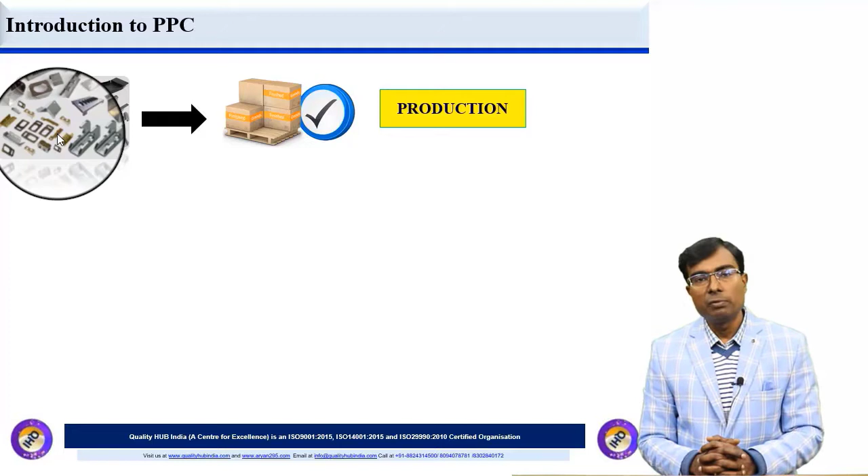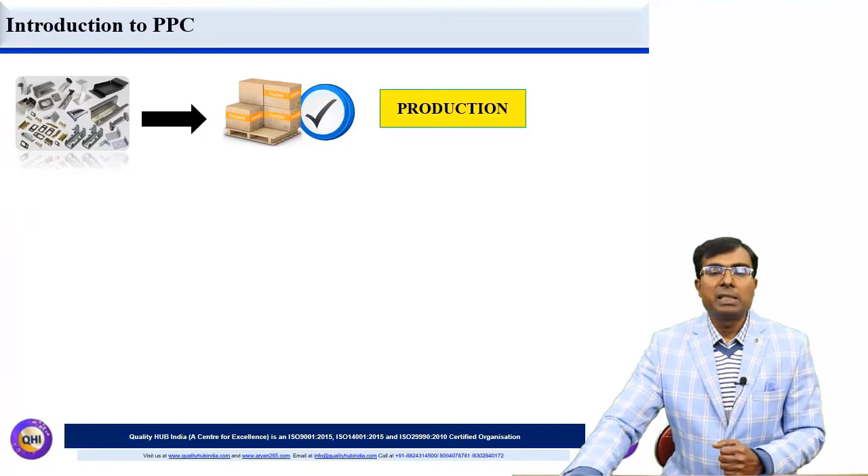So when we talk about production, it primarily intends to convert raw material into finished goods. So we might be procuring different kinds of raw material based on the kind of production or manufacturing activity we are doing. For example, you are doing some forging operations. So you might be procuring billets from the raw material vendors, and by using forging presses, you are going to convert the raw material into finished goods based on the customer specification, which might have come in the form of drawings or other documents.

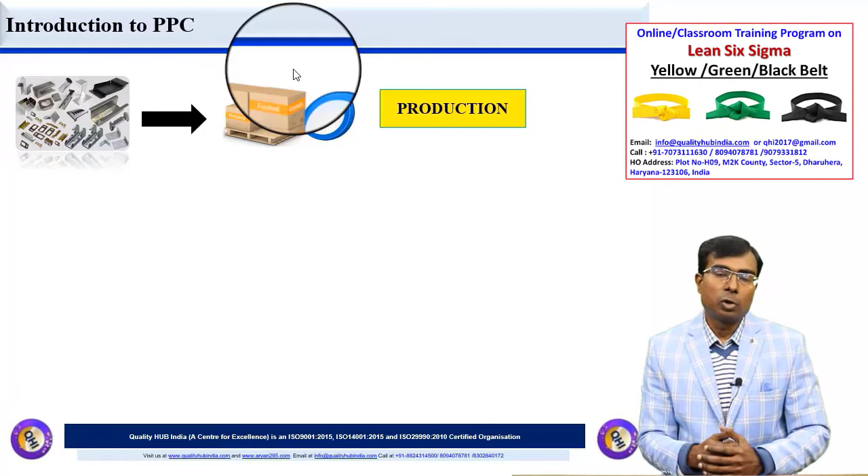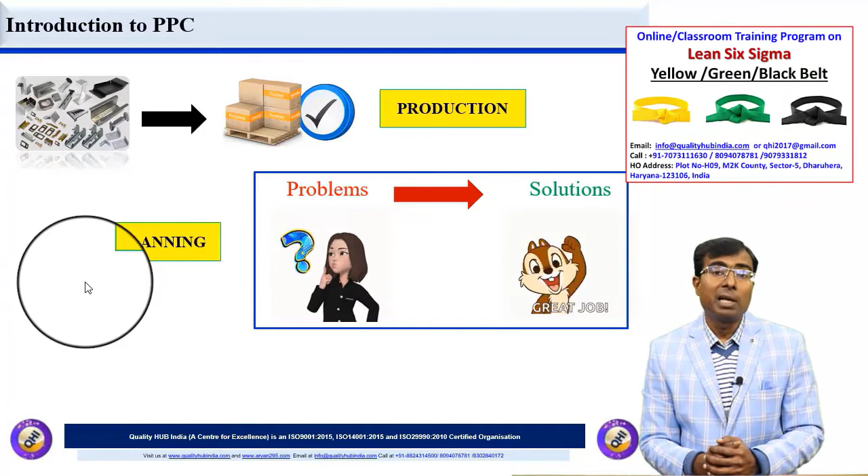The second term is planning. So when we talk about planning, it's basically the expertise of forecasting what kind of circumstances, what kind of failure might be occurring, and we should be ready with the solutions for that. For example, there might be some issues because of manpower unavailability, raw material unavailability, there might be some power failure, there might be some machine breakdown.

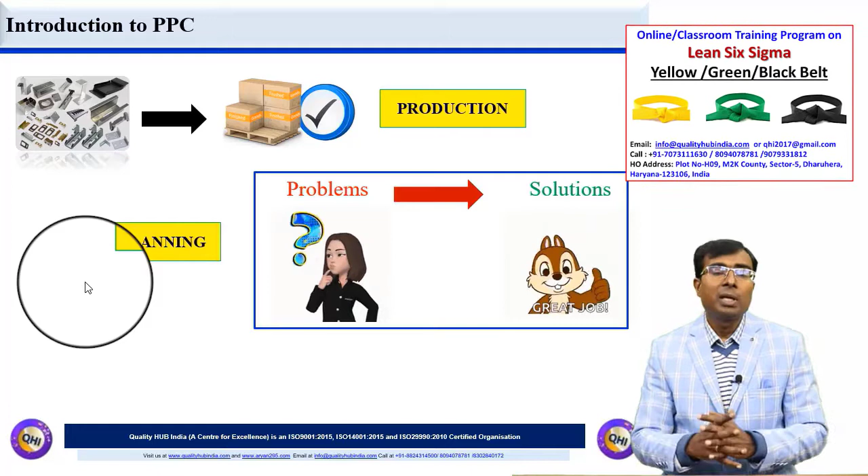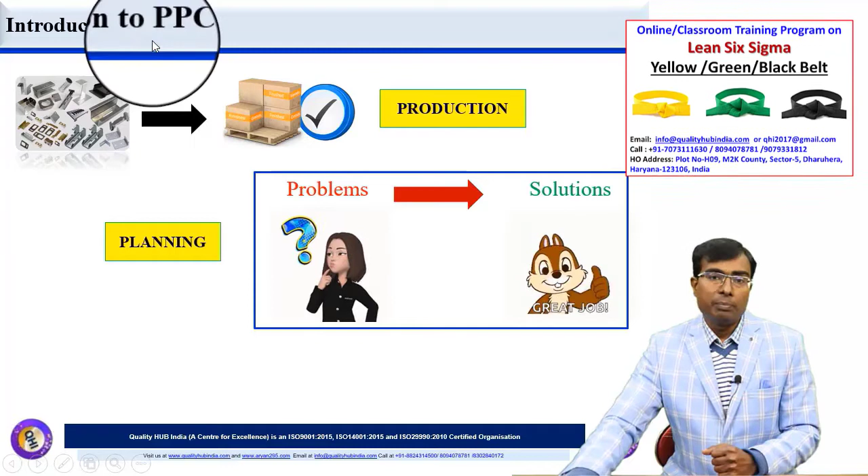So we must be having planning for everything so that man, machine, material, and relevant methods and measurement system and proper environment, everything is intact, everything is working so that we can comfortably do the production activities. So planning is a very important part of PPC. And third is control. So what exactly is control?

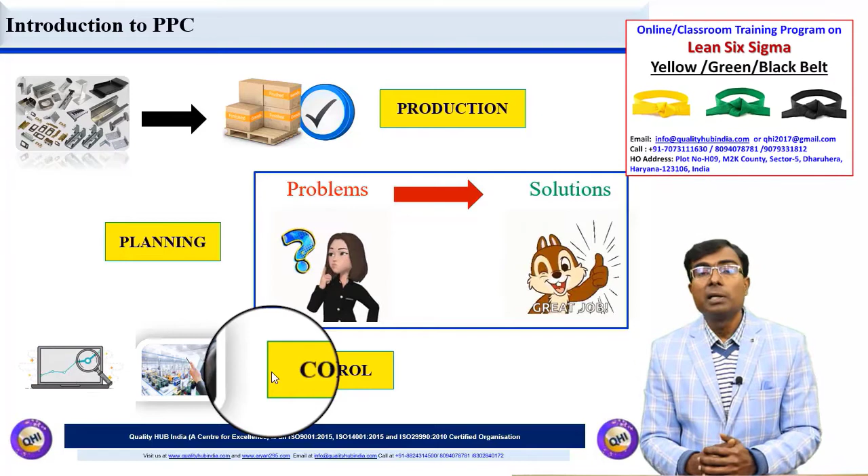Control is whether, for whatever planning we have done for my production activity, things are going properly as per the plan or not. So I need to review, I need to observe whether the inventory level is there properly or not, whether the production is happening as per the target defined or not, whether manpower is available, whether the quality is coming properly or not, whether the machine efficiency is maintained or not. So monitoring, measuring along with the production team and other relevant departments, maybe quality, maintenance, to see that whatever I have planned for the production is properly maintained.

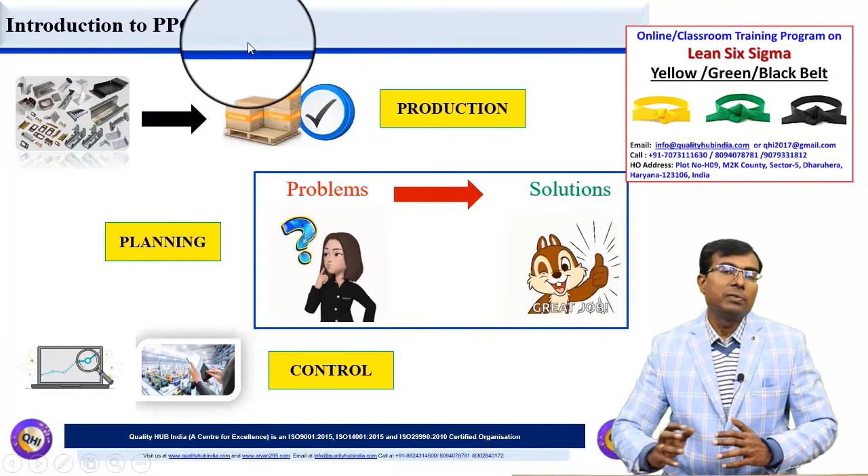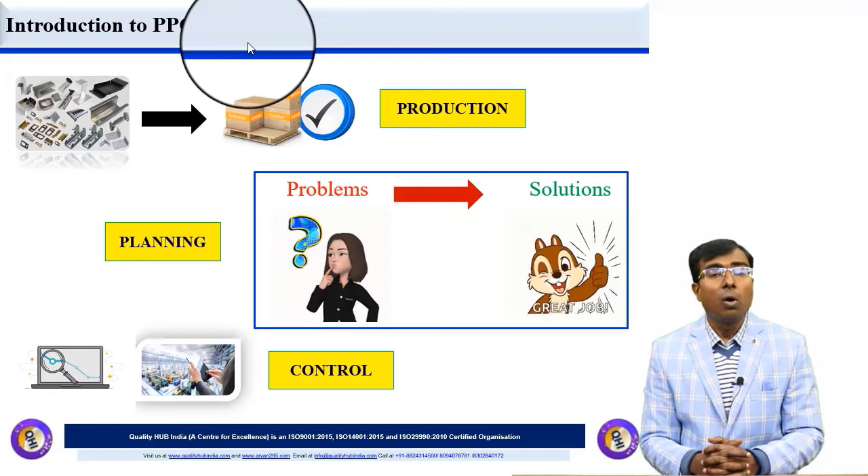So production planning and control is a very important function of any organization, which basically supports and ensures that the required quality and required quantity of materials are produced and delivered on time to the customer. Now let's understand the importance of production planning and control. Even though we have understood certain things in brief, some more elaboration.

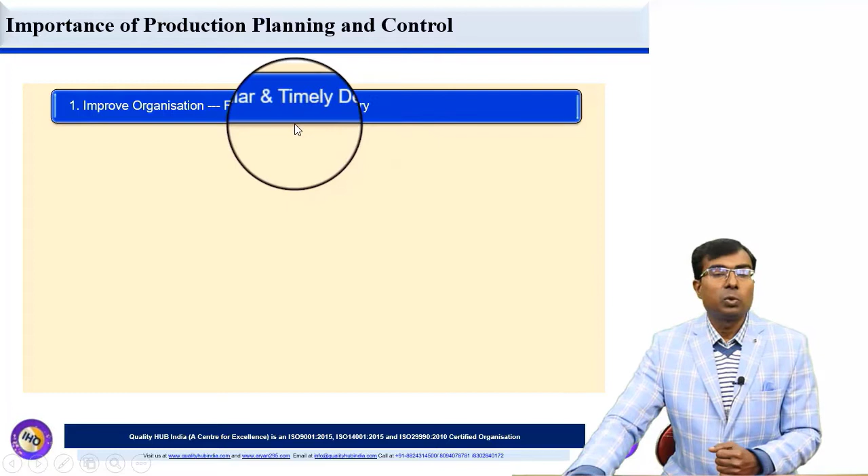And the first one is improve organization, that is regular and timely delivery. So any organization having a production planning or PPC function basically expects that there should be uninterrupted supply of material to the customers on time, in the required quantity, in the required quality, and there should not be any complaint from the customers. So regular and timely delivery is one of the critical expectations from the PPC function.

Second one would be to achieve better supplier communication, which could be for raw material, for consumables or tools. So whatever communication is happening with the suppliers, with the vendors, with service providers, because there might be a scenario wherein the organization has outsourced some of the activities. For example, the organization is not doing plating or painting, they have outsourced. So some communication is required with the suppliers. So the PPC department, in coordination with SQA and purchasing or supply chain department, coordinates with the supplier so that proper communication is established and there is uninterrupted supply of materials from the supplier side as well.

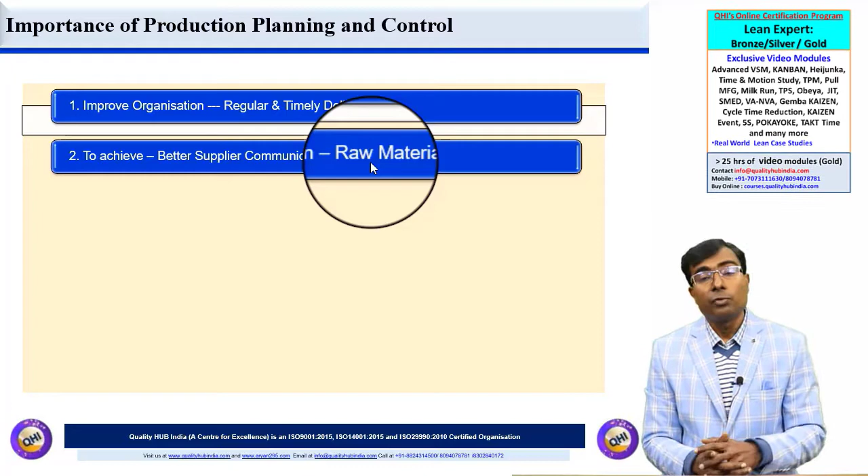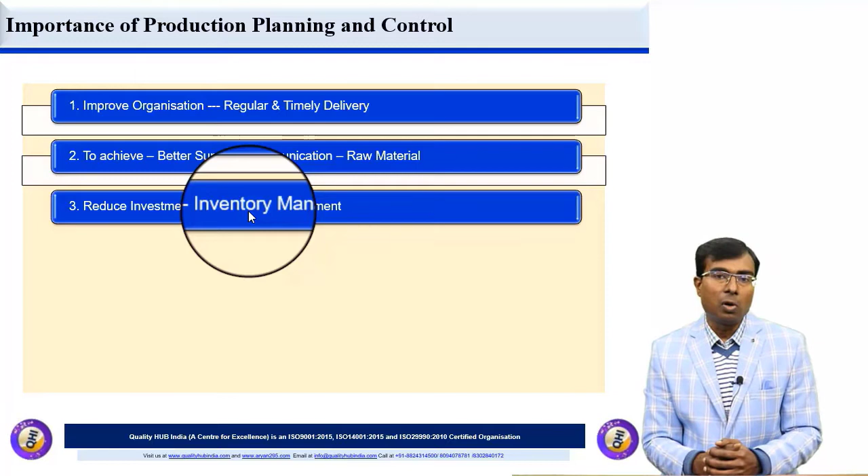Third one is reduce investment, which is inventory management. Inventory management is very critical for any organization. In fact, many organizations are struggling to manage their working capital because they have huge investment tied up in lots of inventory. Inventory could be in the form of tools, consumables, raw material, work in progress or finished goods. So any kind of material or tools or money tied up within the organization, which should ideally be used for expansion of the business, is a money block. So PPC is also responsible to see that inventory management is done in an optimized manner.

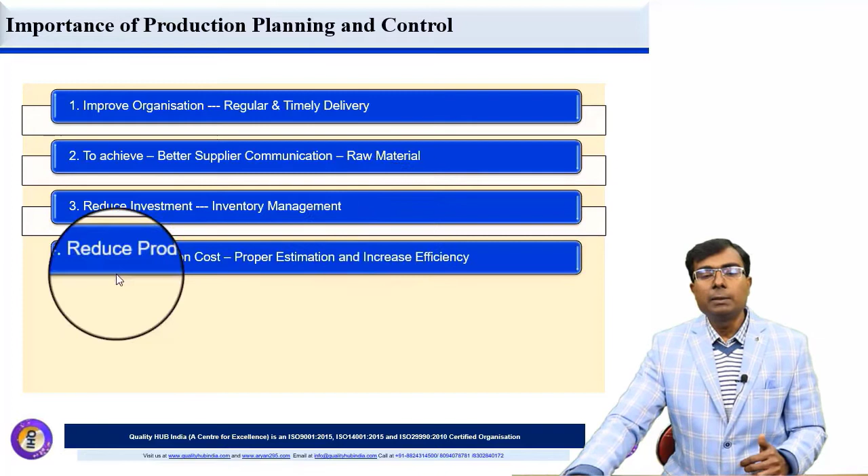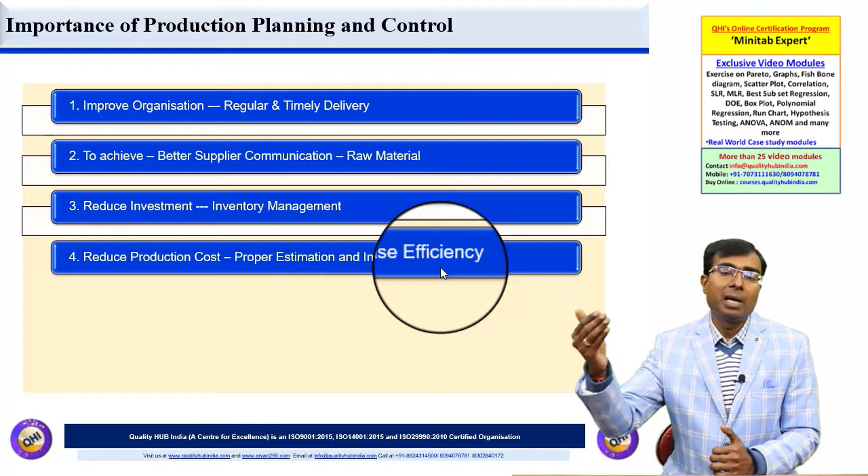And fourth one is reduce production cost, proper estimation and increase efficiency. So whatever production cost and machine efficiency is there right now, production planning and control needs to ensure that proper availability of material is there, availability of manpower is there, machine OEE is properly managed. So they need to work hand in hand with other departments, for example production, quality, maintenance, tool room, so that everything is available, production happens as per the plan, delivery happens as per the plan, so that cost of production reduces.

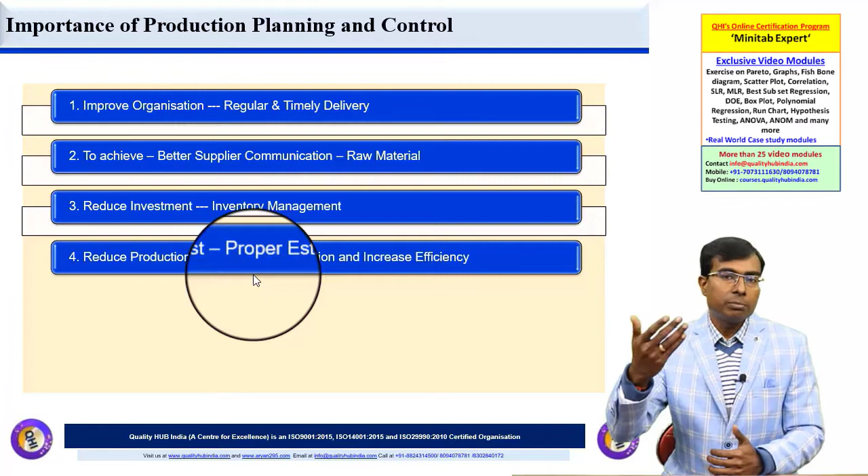And whatever estimation is there in terms of availability of raw material or orders from the customer, coordination with the marketing or sales department and communicating back to other relevant departments so that they are planned properly. For example, they are expecting some shutdown at the customer end, and accordingly they need to reduce inventory at their end, or volume is going up at the customer side and PPC has received some communication from other departments. So they need to plan accordingly to keep some inventory or to ramp up the production. All those things are part of PPC.

Fifth one is smooth flow of production without interruption. So when we talk about smooth flow of production, in fact in lean also we talk about improving the flow.

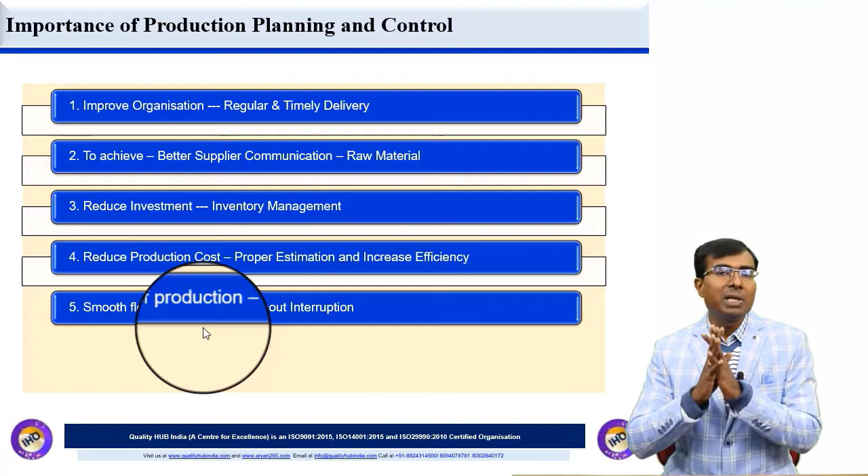So which means that raw material coming from the supplier and the material flowing within the organization till it reaches to the customer side, the entire value stream, should be without any hindrances. There should not be any bottlenecks. There should not be any hurdles. That should be the ideal scenario, and that's what we mean by smooth flow of production. So there should not be any interruption, any hurdles, any bottlenecks within the system. That should be ideally the aim of PPC.

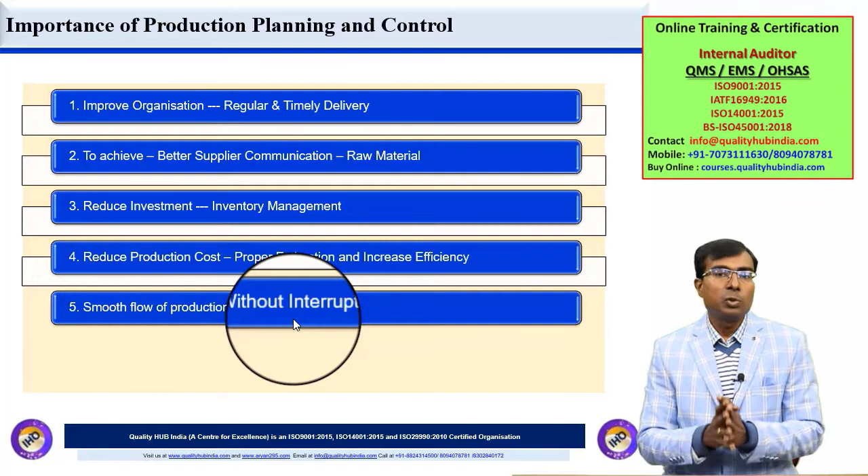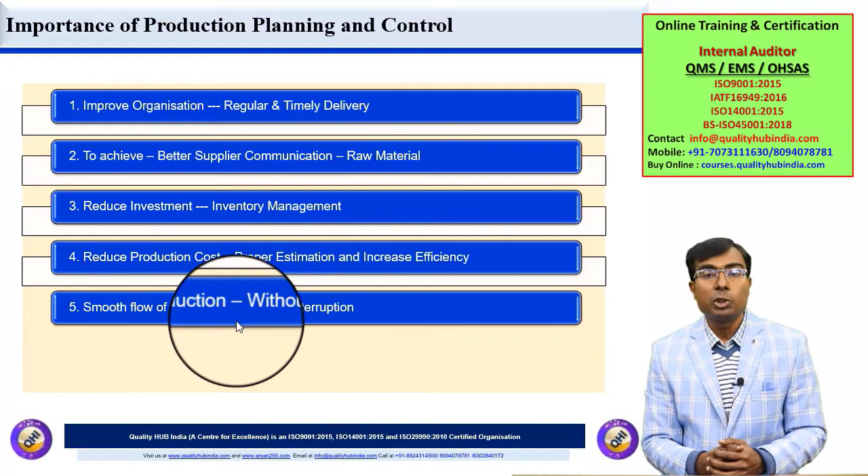And for overcoming this scenario or to maintain this scenario, it's not an easy task. So they need to work together with all other relevant departments to ensure this smooth flow of production. And the sixth one is proper quality and quantity of equipment and raw material during production. So if the equipment and raw material are not of required quality, for example, material is coming without any delay from the supplier side, but the quality is not good, and incoming inspection holds the material and the material is not given to production for carrying out the activities of production, there will be a hurdle.

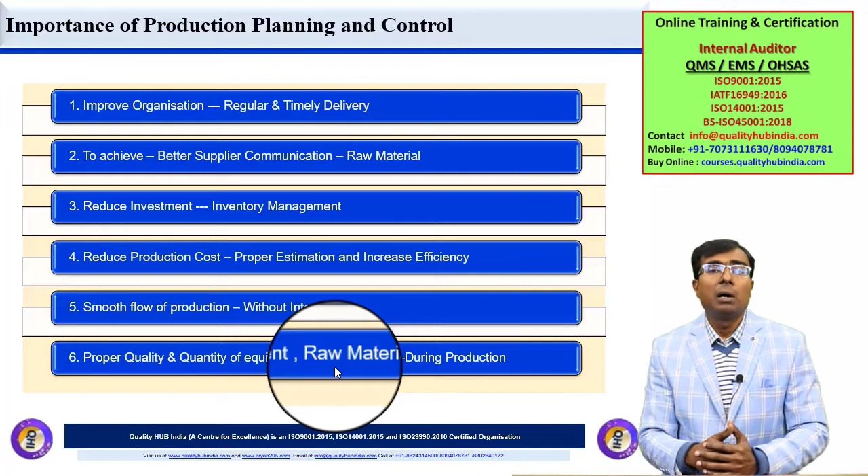And if the material is available, but the machine is under breakdown, the machine is not available, or the manpower is not available. So PPC also needs to ensure that all the critical M's, that is man, material, method, everything, are managed properly, are available properly, and are used in the most efficient and effective way, so that flow of production can be ensured. There should be reduced production cost, there should be reduction in investment, and the organization achieves its objective of uninterrupted supply of material to customers without any quality problem.

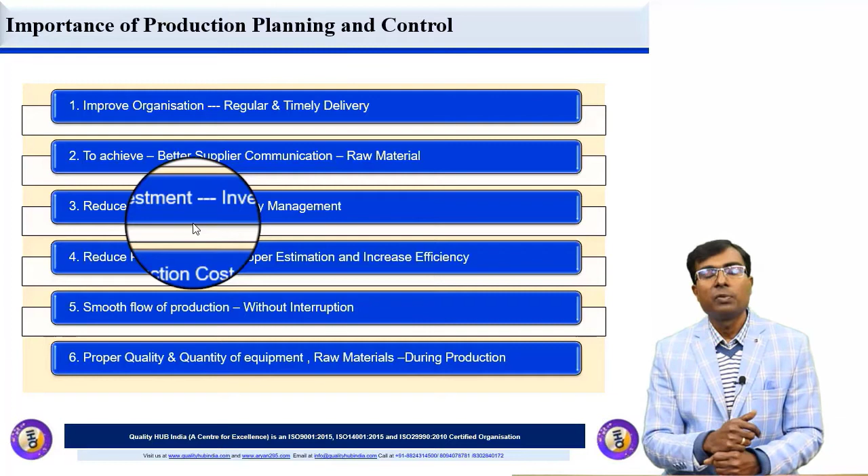Now let's talk about some of the critical functions of production planning and control. And the first important function is forecasting. So forecasting is basically understanding requirements of production, how much they need to produce, maybe in a particular month, on a weekly basis, on a daily basis. Based on the past data, they need to do data crunching and some analysis, and based on the past data, they need to propose some forecasting information so that production planning can be done.

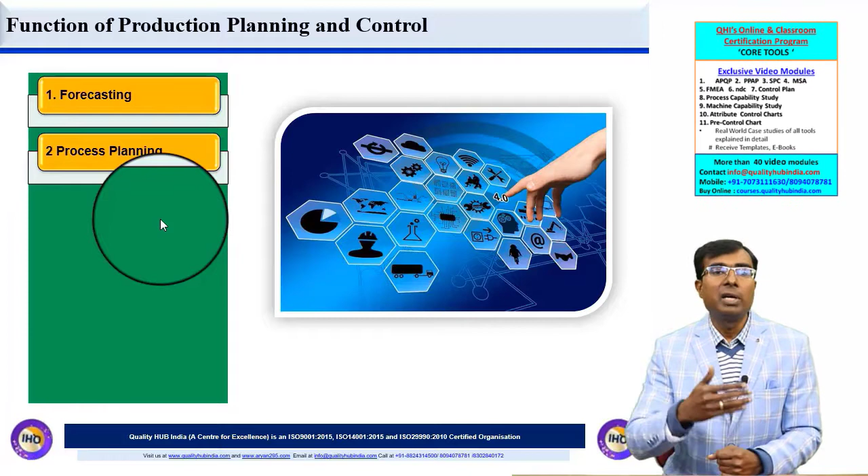Second one is process planning. So process planning is basically meant to say that PPC needs to identify the most economical way of carrying out the production, so that there are no hurdles, no issues at all. Machine, equipment, manpower, everything is used at the optimal level and the production cost reduces drastically. So they need to plan for how to manufacture the product, what are the steps of manufacturing, how much inventory they should be keeping, what should be the flow of material. So all those things need to be planned properly.

Third one is routing. So this is basically about flow of material, how the material is to route, how this material needs to go from one step to another, how much inventory needs to be kept at different stages of production, how the setup needs to be done, how much should be the ideal setup time, so that we can manage the efficiency of the processes at the optimal level. So all those things are part of the routing, mostly the flow of material.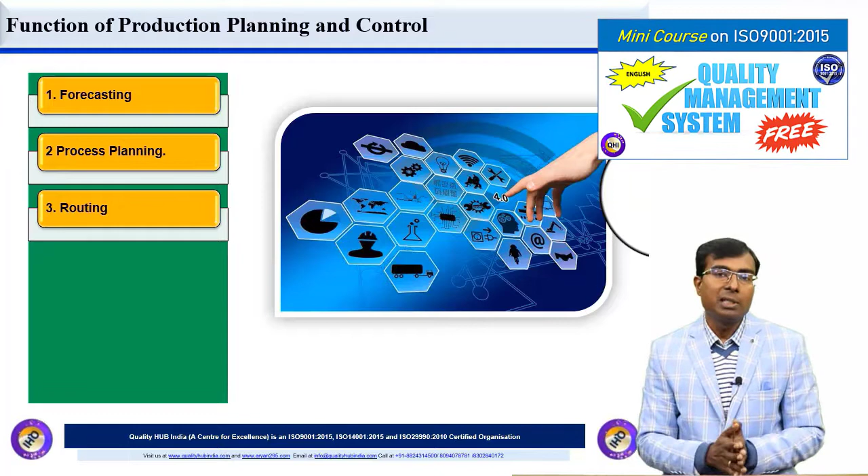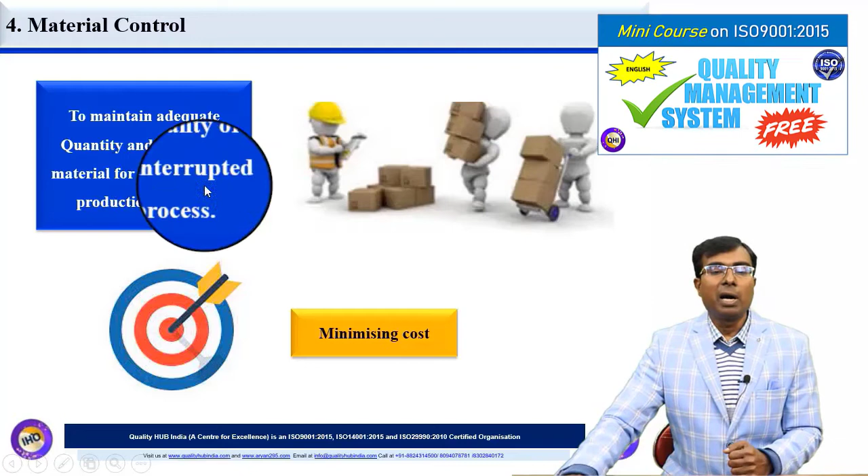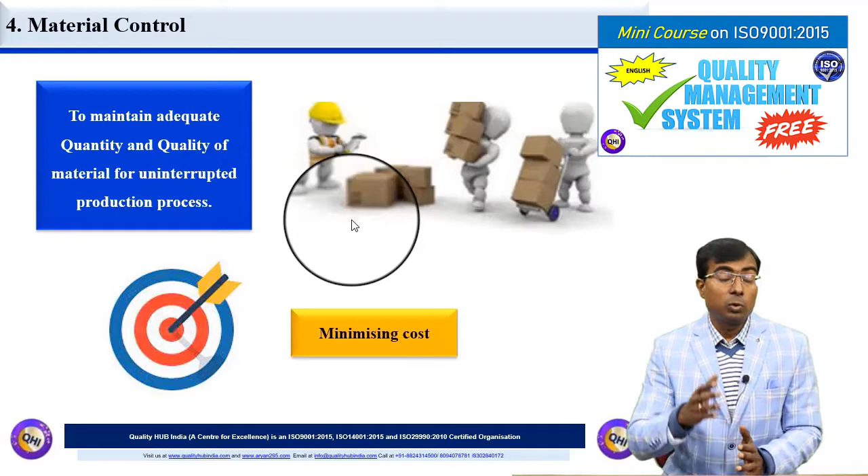And fourth one is material control. So when we talk about material control, it basically means to maintain adequate quantity and quality of material for an uninterrupted production process. So ultimately the PPC needs to ensure that materials are properly available of required quality, so there are no hiccups during the production, and ultimately we can minimize the production cost. That should be the ideal objective.

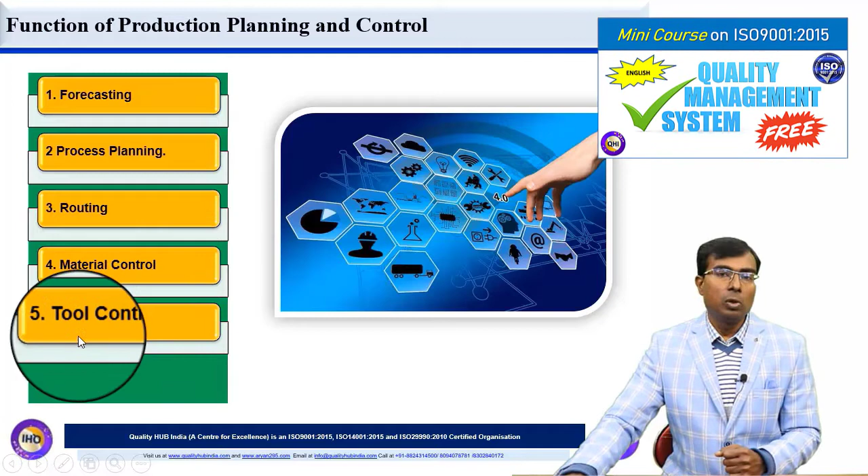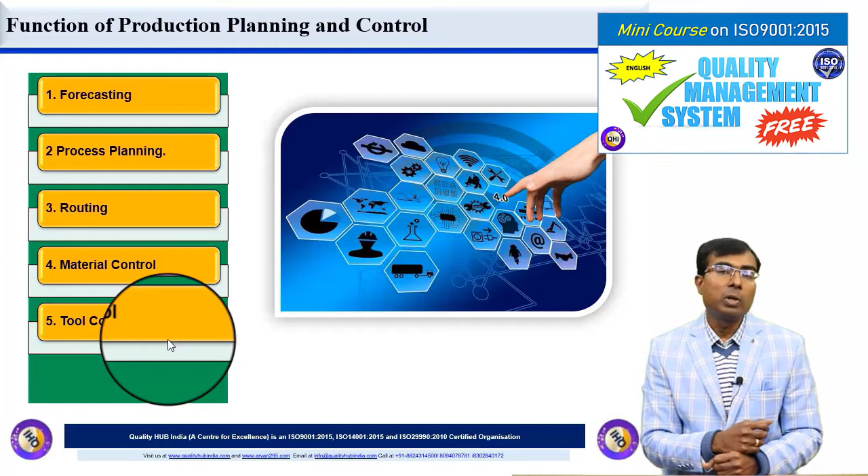And the fifth one is tool control. So tool control includes planning of tools, which means deciding how many tools need to be available, and which varieties. For example, you are using inserts or drill bits or reamers. So all that availability needs to be ensured by planning first, then procurement along with the relevant department, ensuring that those are available, then managing all those available tools properly.

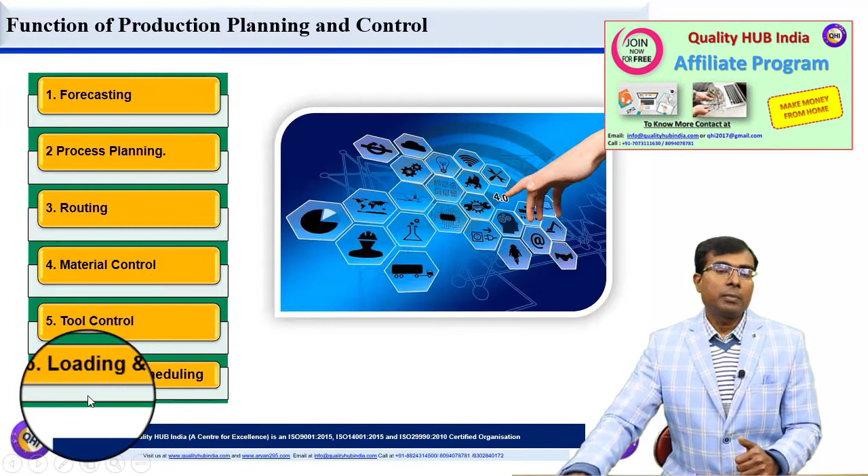And sixth one and the last one is loading and scheduling. So this is basically about planning of machines. Every machine has different capacity, different capabilities. Suppose in an organization there are 10 machines, 20 machines available. So which model needs to be manufactured on which machine, when the production needs to start, when the production needs to complete, what should be the load for the first shift, second shift, third shift, how much manpower should be there for different shifts. So all those things are part of loading and scheduling.

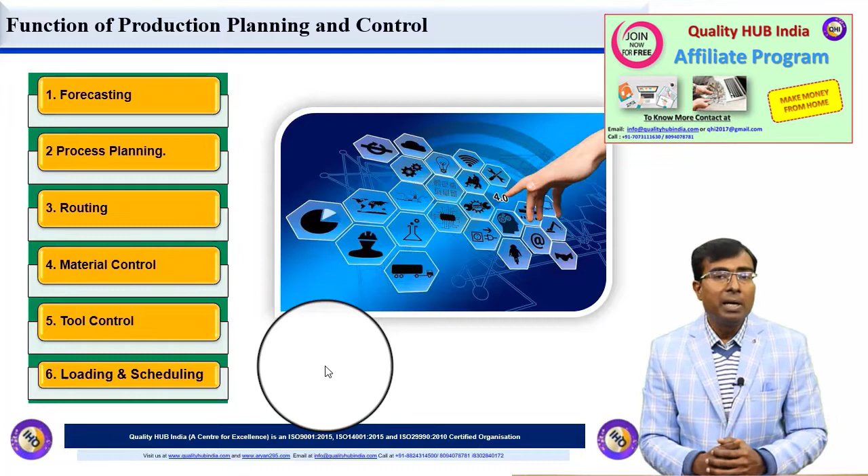So the ultimate aim is to ensure that proper planning is done and machines are properly loaded, equipment and other resources are properly utilized, and inventories are properly available for uninterrupted supply of material to customers without any delay. So friends, I hope that from this module you must have learned what exactly PPC is. I'm sure that you must have learned something from this module.